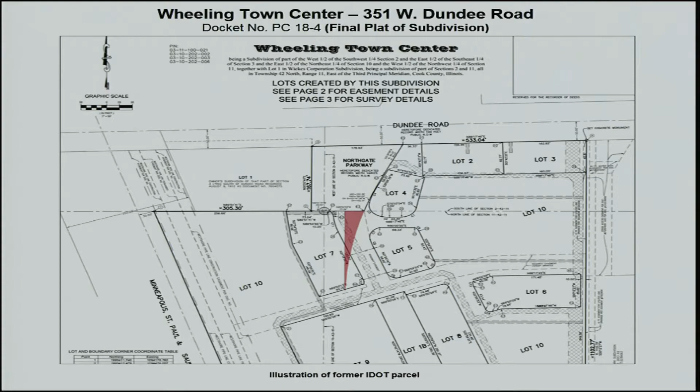Any questions from the commission? Mr. Creech? I have nothing. Mr. Kalis? No questions. Ms. Dorband? Nothing, thank you. Ms. Blanova? Nothing, thank you. And Mr. Fowler? I have nothing. And I have nothing either.

Brooke has a couple things. We have a couple of conditions that were not listed in the staff report. One of them is in relation to a stormwater easement. It's noted in the red lines here. This is an exhibit from our village engineer. One of the conditions of approval we'd like to attach to this docket is modifications to the plat are subject to final review and comments from the village attorney and village engineer, and also that the plat shall include a public stormwater easement as shown in the easement exhibit provided by the village engineer.

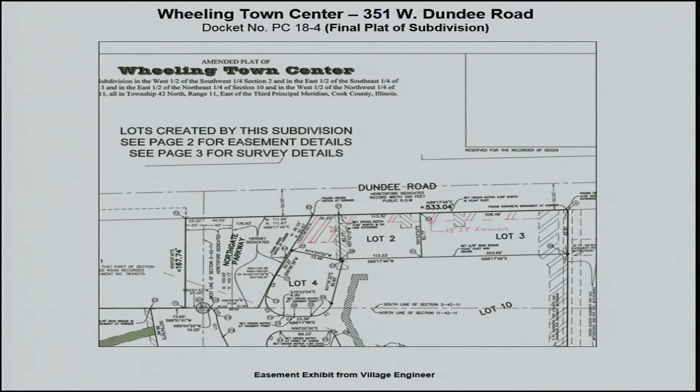So, Brooke, you probably don't know this, but we can't do that. Okay. That's news to me. Yeah, John Tack just sent this to me on Tuesday, and I sent it over to our civil engineer, and we talked to our general contractors. Unless you guys can magically install what it is that you want within the next 4 weeks, we just can't do it. We're breaking ground next month. We're pouring the foundation for the Starbucks pad. We have delivery dates that we have to meet. We can't have you going in there and ripping up work that's going to interfere with our delivery of the Starbucks pad.

It's my understanding that this easement is outside of the building. First off, I have not been intimately involved with this project. Obviously John Tack has, but it's my understanding that this easement is outside of the building foundations. It is. It's right in the drive-through lane for the Starbucks. Okay. So, listen, we have delivery dates we have to meet for Starbucks. If you guys want to cut through a portion of Lot 3 and then angle the pipe across the street, that's fine. But

Okay, that's going to be a conversation. We have an executed lease, we have delivery dates we have to meet. It's just not going to work, guys. I'm sorry. I really am. You kind of pulled this on us last minute. That's just not appropriate. We've been working with John Tack on the extension of the pipe to go across Dundee. That's been the plan all along, and this was thrown at us last minute. It totally puts a wrench in our construction schedule and interferes with the delivery dates that we have promised to our retail tenants.

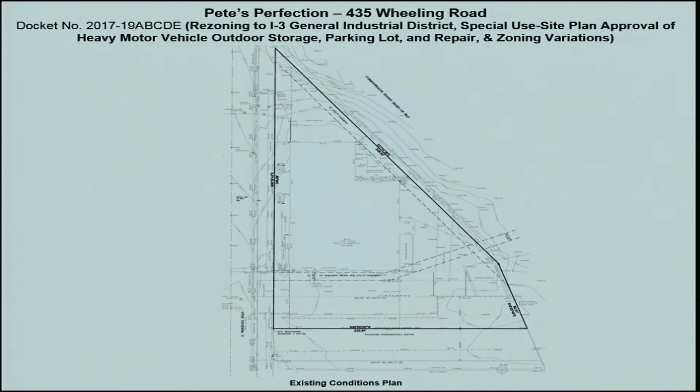So the foot and a half variation, is that what we're talking about? So if you were to look at the proposed new fence line there, because it shows the existing. If you look at the striped spaces and then it notches over, that's how it is now. So now they're just going to go back further 14 feet. Can you show me that with the mouse? Where's that? I'll make this bigger. Look at the striped parking spaces there, those short ones. Yeah. Oh, I see.

Okay. And just so I know, when we had the aerial view and you had the trucks parked into the strip, I think you said the village gave you some land. Is that actually the north part of Commercial Drive? Okay, yes. If you see all those trucks parked right there in front of my building, you see how my fence jogs right there? Yeah. That jog is actually my property line. That line goes straight across all the way to the street. So that is what used to be the north side of Commercial Drive that now you have? I was renting that from the village monthly, and we repaved it 2 years ago. Oh, that's fine. I was just curious, so that is the north end, okay.

The only other thing I have is, we're supposed to ask about bicycle parking. I'm not sure why we would have that, but do you allow people? Inside. They bring their bike inside. It won't get wet in the rain. That's fine. All right. I really have nothing else. Thank you.

Thank you. Commissioner Dorband. Thank you. I think I'm probably the only commissioner who was on the commission when you first came to us. You're the original, right? So we have history. But first I'm going to preface it by, when you first came to us, I had a real concern about how it was going to look up on Wheeling Road, but you have really taken care of it. It looks clean. Every time I drive by there, it's clean. I appreciate that. Thank you.

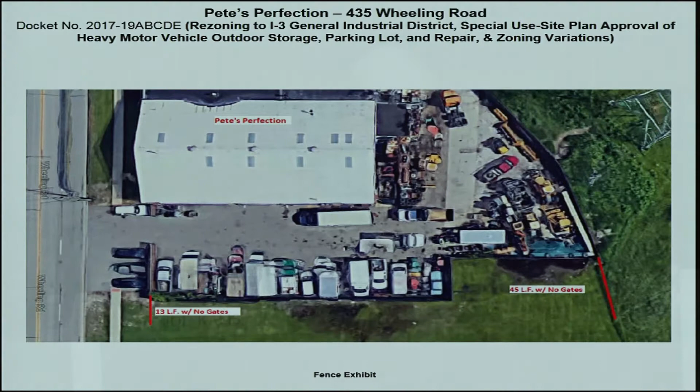Right. I think you'll be able to arrange things in a nicer way. That fence is 8 foot tall right now. Unfortunately, trucks are 13 feet, you know. Sure. I just don't want tires and engines and stuff, obviously trucks are trucks. Right. I think you have the benefit of the fact that there's a field behind there, so there's nobody from the other side looking in, all you have is the railroad track. Right, so there's tracks, well, there's trains.

So my concern about this visual was, I'm only 5'7", so I'm not gonna see over an 8-foot tall thing. In a car, you won't see it, so I'm not as concerned about that. And then landscaping, it'd be nice to have more, but like you said, do the best you can. I'm sure you would like to make it look as nice as possible, but you still got power lines everywhere, so a tree makes it look so nice, but.

I was curious if you were actually storing anything there, which was answered. And the previous gentleman said that you were going to expand, and that was my question about how much you are going to expand. So I'm good. I'm excited for you to have more space where you can do things as you wish.

No Tetris. But of course, you'll probably grow even more, and then we'll be here in 5 years and have another conversation. I can't go nowhere. No, in 5 years, Palumbo's going to buy me. He'll take it over. Alrighty.

But as long as the fence is intact and 8 feet tall and blocks the majority of the stuff, I'm fine with that. There was some kind of variance. Somebody said something about the fence being a different height. I don't know where that came from. Durabel built my fence. It was set at 8 foot. It may have been on a previous submission. The original submittal had conflicting language regarding the fencing height. I went out there physically and measured, and it's even all around. Clarified, it's one height. Okay. Cool. That's it for me. Thank you.

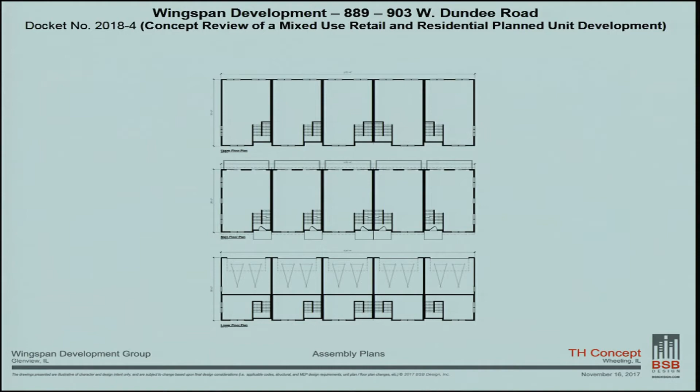So we are optimistic about the property and the prospects of redeveloping it. We can understand why it has not happened yet based on our due diligence, what it's revealed to date regarding the soil conditions. But for the TIF, we don't believe that this redevelopment would be viable because of the costs associated with particularly the soil conditions. So that's my presentation. I'm happy to answer any questions. Thank you.

Commissioner Dorband. Oh, thank you. Well, I like the concept, but when I look at the density, I think it's way too dense. I also, on my first look at it, there is not enough guest parking. And my third piece of it is, while you say you've addressed the snow, I don't see it. I don't see that there's enough space where you can store snow.

Even, I mean, if you double the amount of guest spots, at least you would have a place to put snow if you needed to. But certainly it's not balanced as far as guest parking. You've got the guest parking all the way down to the left, but there's nothing up at the top. Can you explain to me why you think that's appropriate?

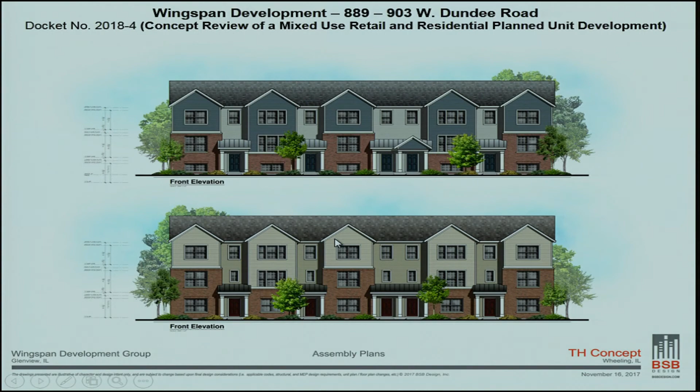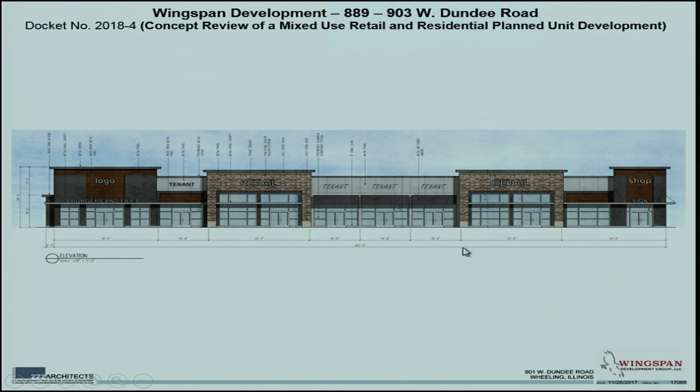Well, I think it's very attractive. I always have concerns about strip malls in this town. We have a lot of empty storefronts right now. Do you have other developments that you can say, hey, look at this one, it's very successful? We do. We have one that's very similar to this in design, a little more contemporary, that we did in Arlington Heights. That one has a Sherwin-Williams, a couple of smaller retailers, and a Culver's as the outlot. I know what it is.

And what we think is very different, you can see the building here. This is the existing building of Dunhurst. We are moving our buildings closer to the street. You've got 25,000 cars a day on Dundee. The existing building is so far back off the street, and when you're approaching from the west, you can't even see it because of this tree stand. By the time you see the building, you're right here, so there's no way you can even get in the lot.

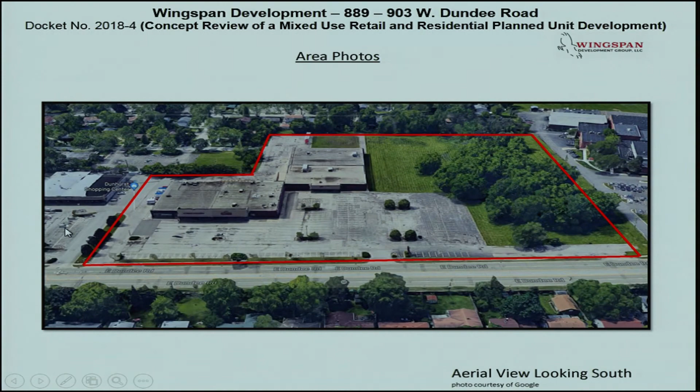So we're moving our buildings closer to the street. The outlot would be right around here, so this will actually be visible from 83. That's part of our design, that someone stacking at the light at 83 can actually turn their head and see that space.

The other thing is the drive-throughs. There is a lot of retail in the village, but not a lot with drive-throughs. Agreed. So we believe these end caps will make a significant difference in the success of the businesses with end cap drive-throughs, and also the retailers next to those users. That type of use drives more traffic, both drive-through and walk-in, and that in turn helps the retailers next to them. I hope you're right.

I think that's all I had. Mr. Chairman, I have a couple more comments. Any other? Commissioner Powers? How are you going to handle mail delivery, mailboxes, and can you also address, maybe I'm not seeing it, garbage pickup? How's that going to happen?

So the garbage pickup, and especially more for the residential. Okay, so for the residential, the garbage cans will, as we talked about earlier, be in the garage, and then just like a single-family situation, you'll put your garbage out by your garage. The garbage truck will back into these motor courts and then pick up the trash.

In terms of mail, the Postal Service now mandates, essentially with every kind of new development, what they call a gang box, or a common box. And they have very specific guidelines as to what those look like. They're typically mounted by the curb, so they're easy for the carrier to access.

Mr. Chairman, I have two questions. The exit to Dundee, are they right in, right out, or are they going to be able to go west? This one is a full access. There's actually two full access curb cuts right now, and we're maintaining this one in the center of the property. This one is an in only on our side. Can you turn west? You could turn west from this one. To turn west here, you have to go onto the Dunhurst Plaza side, and you can turn west from there. It's the same as how it is right now?

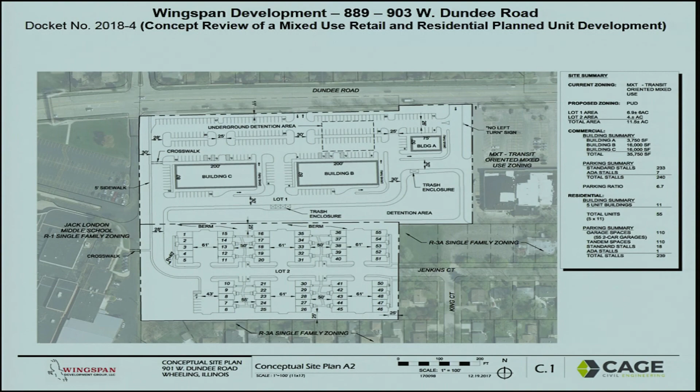So both of them, you'll be able to exit west? Correct. Okay. And even this one here, you could exit west, which I thought was closed. We are eliminating that one. That's eliminated. My other question is the detention area, is that a dry basin? It's what would traditionally be considered a dry basin. The way MWRD's guidelines are now, they have the release point 6 inches above the bottom of the basin.

So is it going to be regular grass, or is it going to be like wild foliage? Yeah, they call it weeds. It has a natural grass, but it has to be a little bit hardier than sod because it will be wet longer. It's not a wet bottom detention basin, but it has to be a hardy enough planting material. So it will be maintained. When it's dry enough, you'll be able to cut it?

I don't know that you would cut it. As we go through the engineering design process, that'll be clearly defined in the engineering submittal, what the actual planting materials will be on the bottom of that basin. Okay, thank you. Thank you, Mr. Chairman. Anyone else? Anything?

So we are looking for a vote to move this along then? Yes. So do I hear a motion? So moved. How's this worded? It's not a formal approval, it's just kind of a consensus on if everyone is okay with it proceeding forward. Okay, so it's not really a vote. Correct. Rookie over here. All right, Commissioner Creech, do you believe they should go ahead and work on the preliminary? Absolutely.